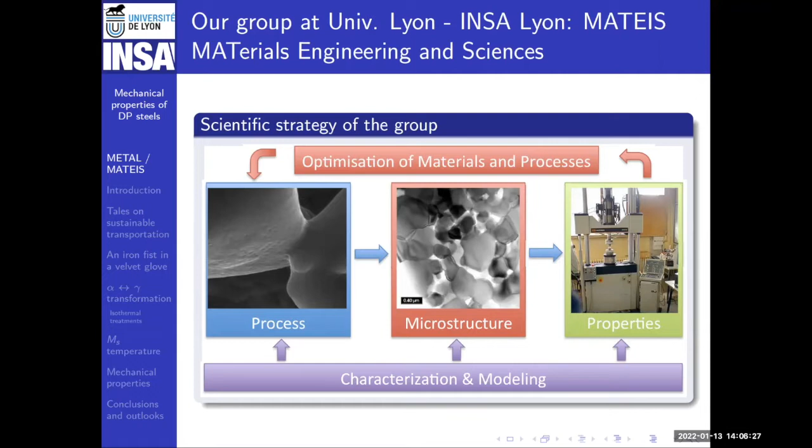Our favorite tools are some characterization and modeling tools. There are some quite historical characterization tools developed in the group, starting from the left: small angle X-ray scattering, essentially for polymers, to detect, for example, for semi-crystalline polymers. Then thermoelectric power, to measure the evolutions in the microstructures of metals.

X-ray tomography—and very small here in the picture is the head of the lab, Eric Maire, who was famous here at LMS because he used to work a lot with Michel. Some of you may know Michel, some of you may not, I don't know. This guy was really working together with strong connections, us doing the 3-dimensional analysis and you doing the mechanical modeling. There was quite a nice history of collaboration between MATEIS and LMS with this technique.

And of course, at the right, electronic microscopies: transmission, scanning, and all these techniques.

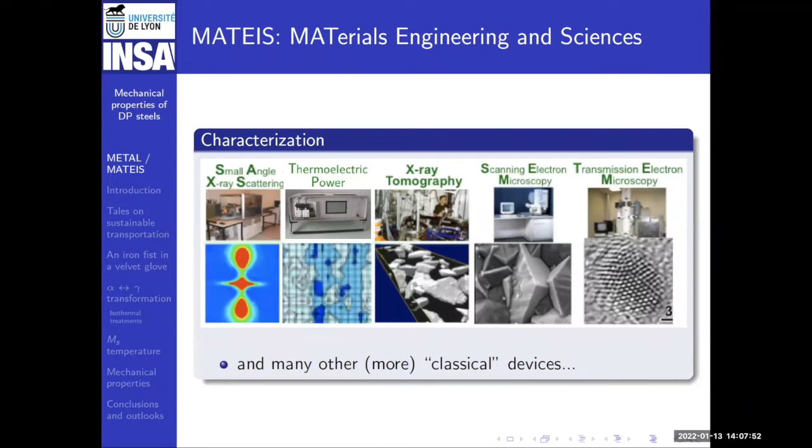In parallel, it's a bit more recent—let me change my slide. In parallel, we developed many simulation tools to better understand the build-up of the microstructures of materials and also the mechanical properties. This graph is something you've seen a thousand times, and these tools are the ones we are developing at MATEIS, from the atomic scale.

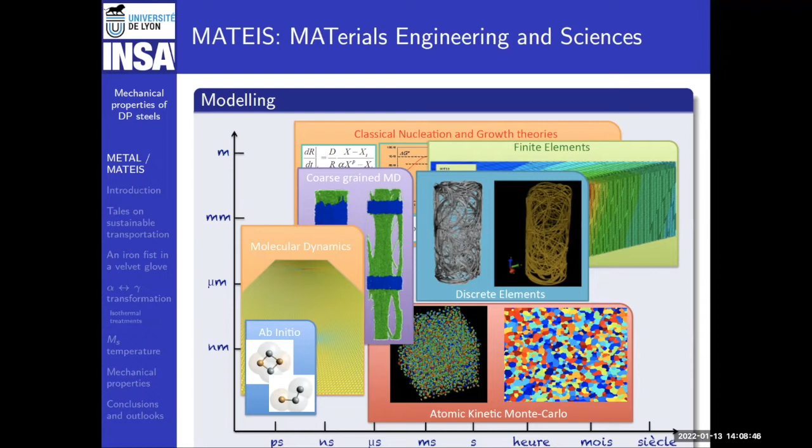So from ab initio simulation, molecular dynamics, coarse-grained molecular dynamics to study, for example, block copolymers, to finite elements, passing through atomic kinetic Monte Carlo, and all these kinds of simulation techniques that we are developing.

Within the MATEIS group there are a few teams: one studying polymers, one studying ceramics, one studying metals. Here I will present my team, the one I know better, the metal team, the group of people studying metals. We are approximately 60 people including everyone, with a majority of PhD students, the ones actually doing the research. Here are some numbers you can read if you want, concerning the metal team in MATEIS.

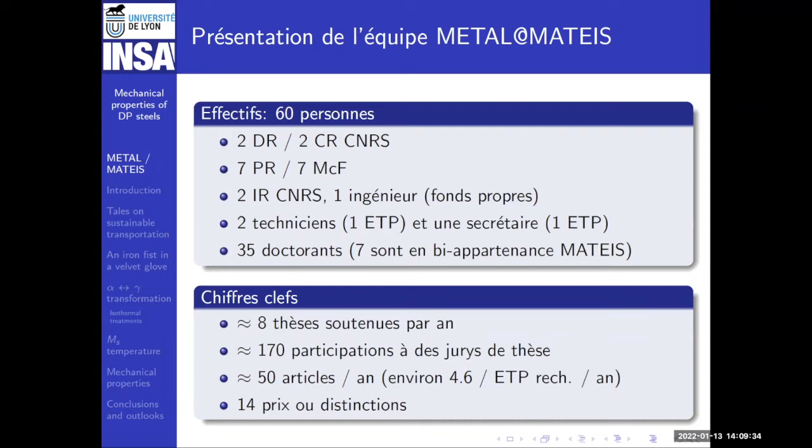Any question? Okay, so in the metal team, what are we doing? We have mostly three main activities. The first one is elaboration—how to build...

Oh, that's great. Super, excellent, thank you very much.

First team is elaboration. We are building graded materials, studying sintering, welding, and we recently bought arc melting and atomization, which is coupled to robocasting. So we can make nice materials with nice structures.

In parallel, there are people working in what we call physical metallurgy. This is the understanding of the build-up of microstructures. One group specializes in studying mechanical properties, because most of the materials we study in the metal group are studied for their mechanical properties. We are increasingly doing very specific elaborations for other properties too, beyond structural ones, for example biocompatibility for biomaterials. But basically, this is the DNA of our team.

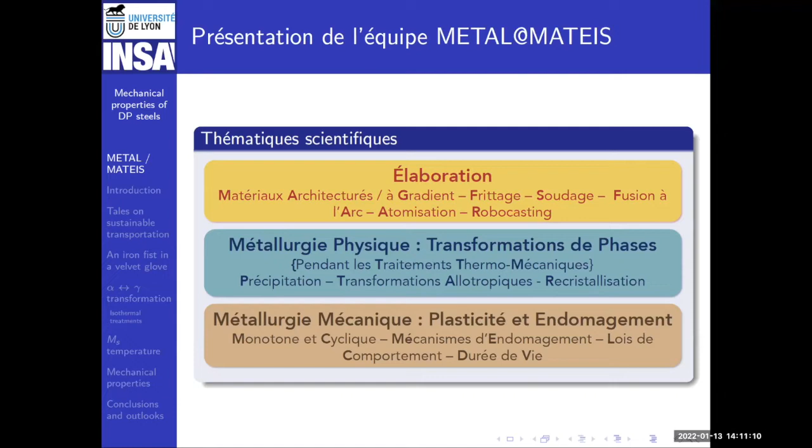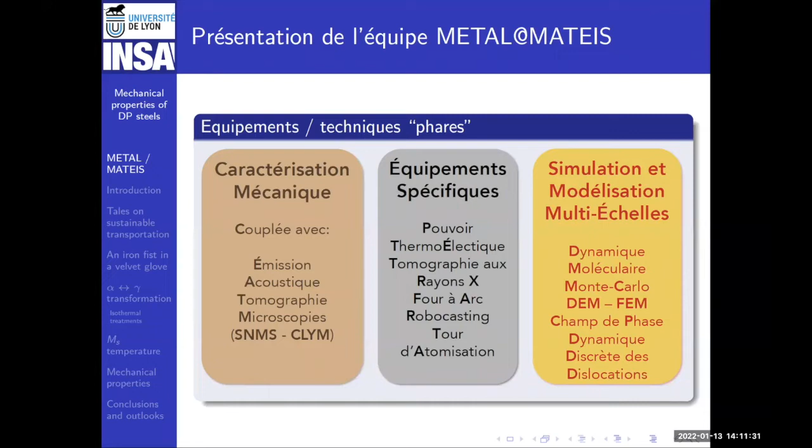So what are the characteristic equipments that we have in the metal team? Techniques to characterize the materials, specific techniques that I presented, and simulation techniques that I also presented. So this gives you a quick overview of what we are doing in the team. Any questions? Okay.

As I said, there was a quite interesting history of collaboration. I think it stopped because of the departure of Michel. It can start again, of course.

The motivation of this PhD work I'm going to present is to improve the properties of what we call the body in white of a vehicle. The body in white is the bones, the backbone of a car, made of metal. As you know, if we improve the fabrication process, eventually we can have lighter materials. That's our business: how to design, how to make lighter materials.

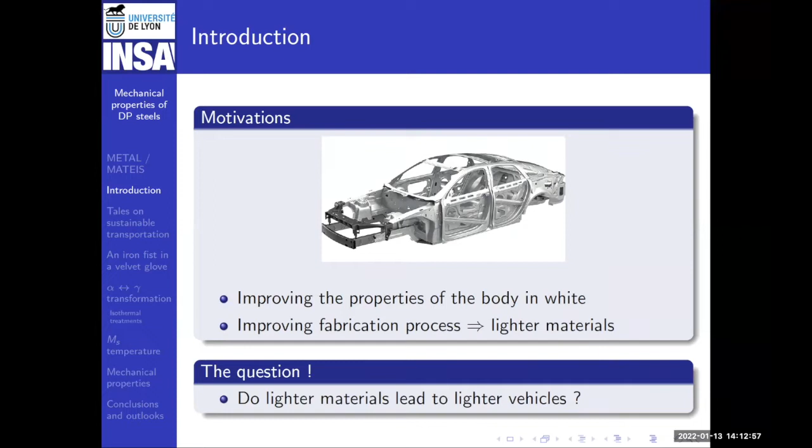There is this big question: do lighter materials lead to lighter vehicles? That's the motivation. We often mention greenhouse gas emissions. Of course, if we have lighter vehicles, we save gas and then we save CO2. In fact, this question is not so simple, as you will see.

And this brings me to the tales I wanted to present. The first tale is that progress in material science makes cars, and planes too, lighter. In fact, if you look at the numbers, the average mass of vehicles over time, you see that cars, even though we expect them to be lighter, are actually heavier. What a failure. So what went wrong?

We are making lighter materials for sure, I promise, and you are also maybe doing the same. Yet at the end, with lighter materials, we build heavier cars. That's a big question, isn't it? The first tale people believe is that if you lighten materials, you end up with lighter vehicles. That's wrong, obviously. So there is something wrong here. Maybe we can discuss that later, but this is an interesting point to present.

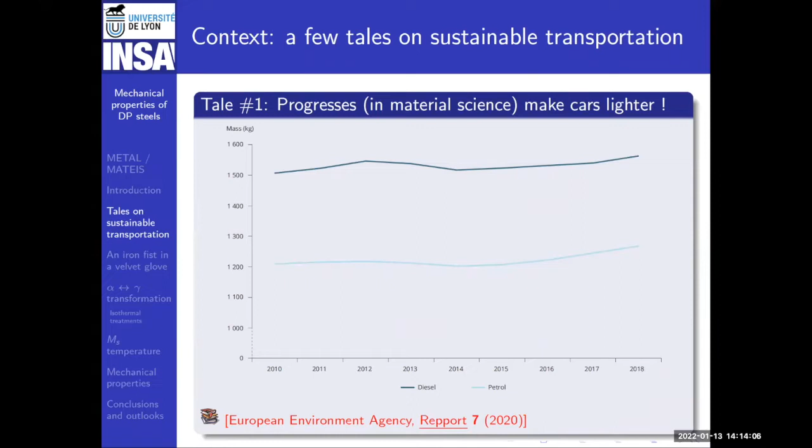The second tale is that, thankfully, we live in the EU. We don't live in Australia or the USA, where there are no rules. In the EU, we have rules and standards in terms of fuel efficiency. And in fact, yes, it's true, but not as we might imagine.

Here is the European Union standard. Here is the emission you are allowed to make if you build the car, and here is the weight of the car. What you see, which is surprising at first glance, is that yes, there is a standard, but it's not a horizontal line. This standard depends on the mass of the car: the heavier the car, the more CO2 you are allowed by the EU to emit.

That's strange, isn't it? So if you are a car builder, would you go there, or would you go there with twice the margin that you have? Obviously, it's better to go there. So there are no real rules to make cars lighter.

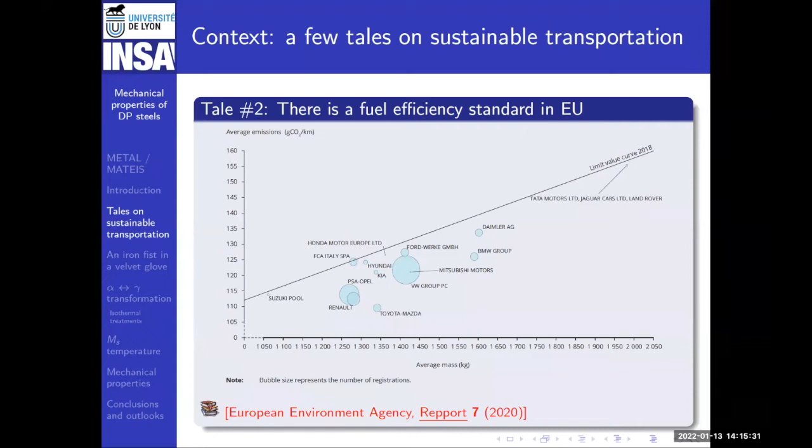So, third thing: recycling. Oftentimes you go to a conference where industrials are invited. I remember at SF2M, there were industrials saying, 'oh, don't worry, we recycle almost 100% of our production, that's fantastic, there is no problem.' Okay, recycling — let's go a bit deeper, let's stay in the car market, okay?

So let's imagine we are in 2019, and let's assume this car market has a growth per year of 3%, which is quite reasonable. So each year, you have 3% more cars than the previous year, okay?

So in fact, this is the actual fleet of cars, and each year a bit of these cars, the blue part here, are dead. And each year there are these new vehicles in red. The difference between this year and this year is only 3%. So let's zoom in a little bit.

So all these end-of-life vehicles, let's say we recycle the steel, the aluminum, all the materials up to 95%, which is really a nice number. So you recycle 95% of end-of-life vehicles, but at the same time you have to build new cars because the market is growing 3% per year. So at the end, if you compare the new cars you have to build, the end-of-life cars, and this 95% recycling rate, you still have half of your production each year coming from raw materials, not recycling, because there aren't enough old cars to recycle.

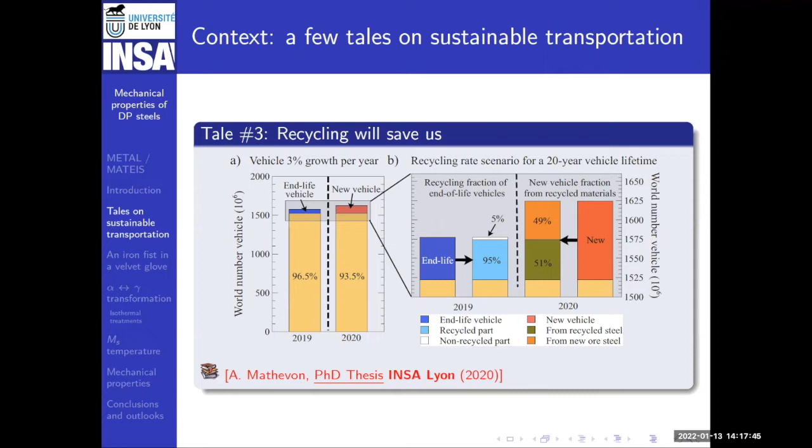Okay, the last one. Oh sorry, yes? I was simply wondering, on the major market, like I suppose the European car market, in the long run is an increase in the number of cars reasonable? I mean, if we assume the number of cars produced is going to stabilize—to me I don't have the figures, but it's not complicated—it would be far less of a problem.

Exactly. All the recycling problems I explained are due to the fact that the market is growing. If the market is plateauing—but I think that's a conclusion we can draw about all human activities—if you are happy with what we have, then we have no problem. The problem is that we always want more, we always produce more, we always earn more, and that's the source of the problem, maybe.

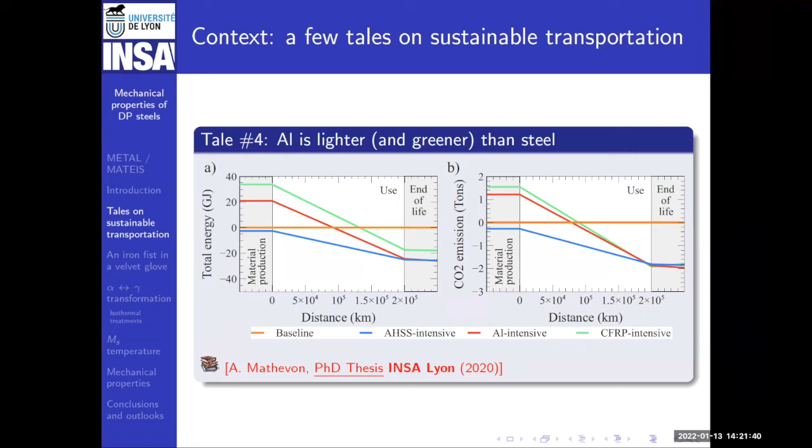Okay, now it's time to enter into the details of what these high strength steels are that I'm going to present today. And I'm going to present one example, which I call dual phase steels.

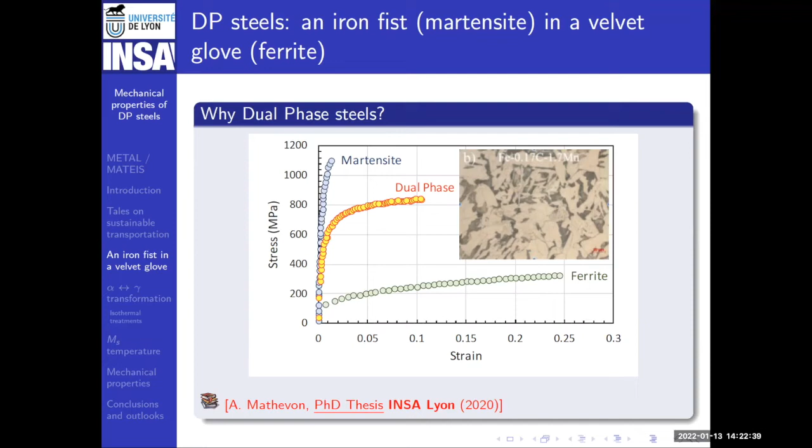So mostly there will be 3 parts to this talk, and don't worry, if we don't have time for the 3 parts, there will be 2. It's not a big deal.

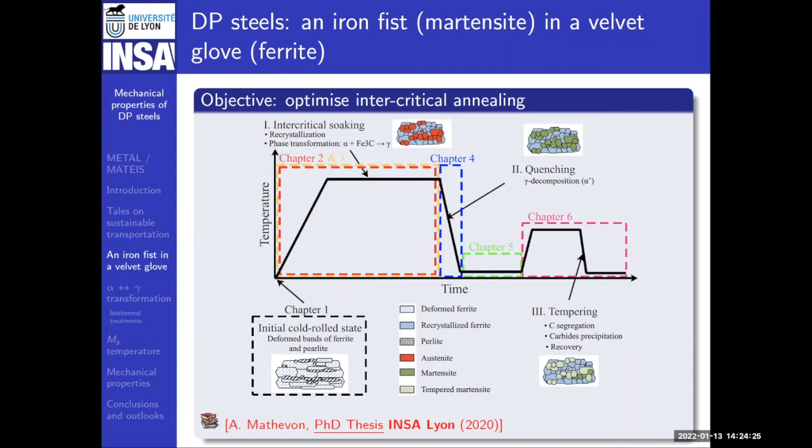Okay, so let's enter into the modeling of alpha to gamma transformation. Recall, this is what happens in dual phase steel when you heat and wait in the intercritical domain, where you have both ferrite and austenite at equilibrium.

So there are some existing models. I'm not going to enter into details. The most famous is Dictra—maybe you know Dictra, it's the friend model of Thermocalc that you may know. But Dictra is based on local equilibrium, meaning equilibrium at the interface, which is not always the case.

There are some other more elaborated models. Maybe the most elaborated one is phase field, that some of you may know. So what we did was we designed a new model which would take a bit of each of them, take only the advantages. The idea is to have a thermodynamic database based on Thermocalc.

We do not require any special equilibrium condition at the ferrite-austenite interface, and the model obeys a simple extremum principle, which is that the direction it will take is the one that minimizes the Gibbs energy function. That's why it's called the Gibbs energy minimisation model. So it will choose the minimizing direction to minimize the Gibbs energy.

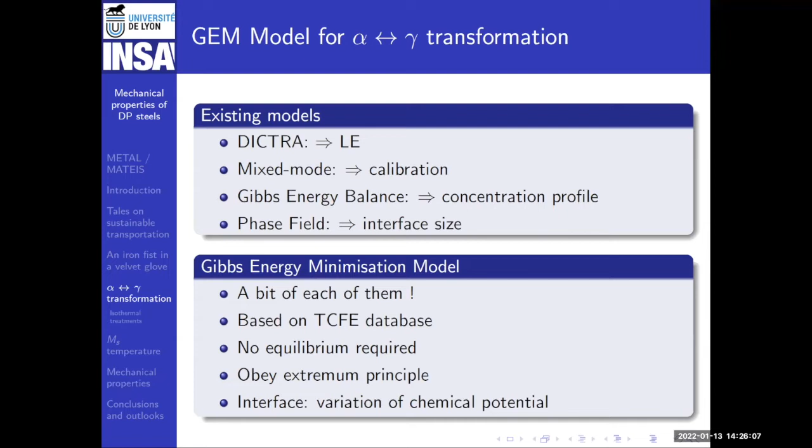So to build this model, we start with the first ingredient, which is extremely well known and nothing new: we model the fact that a diffusing element, a solute atom gradient, will naturally transform into a flat profile. So first ingredient, diffusion—diffusion of, for example, carbon or manganese or any kind of solute elements in the steel, in both ferrite and austenite.

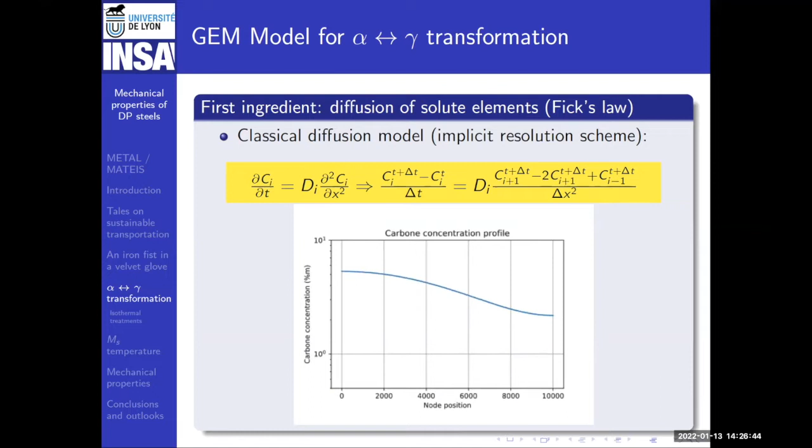Second ingredient: remember, we want to model the transformation of ferrite into austenite, so we have a moving interface, and we want both phases to be described with an interface. If you have an interface, you cannot use this classical Fick equation—you have to transform it into an equation where the diffusion is a function of the chemical potential and not only the concentration. So we have to slightly transform the diffusion equation, and let's say that the interface is seen as a chemical potential variation.

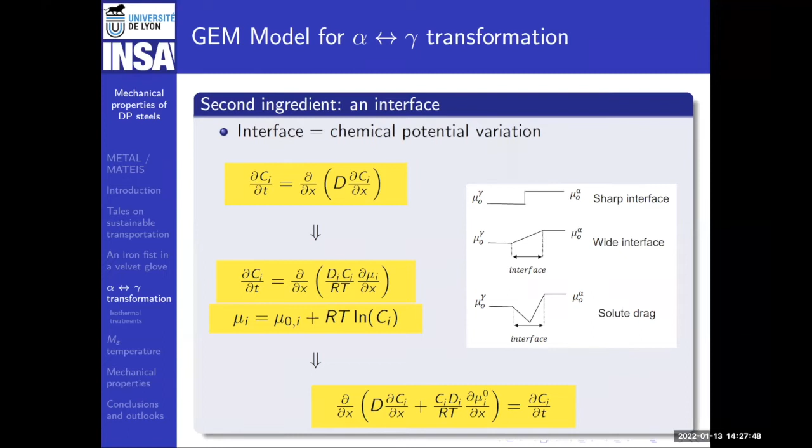If you have, for example, austenite on this side and ferrite on this side, the chemical potential is a step function like that. We can have an interface which has a certain width, and eventually a kind of potential well, accounting for the fact that solute atoms may prefer to locate at the interface. So once we include this ingredient, let's see what happens when you start with a constant concentration profile, but with a chemical potential that makes a step. What we end up with is a concentration that's higher in one phase and lower in another. If you think of iron-carbon, for example, carbon solubility is much higher in austenite than in ferrite. So that was the second ingredient of the model—the modeling of an interface with two different domains.

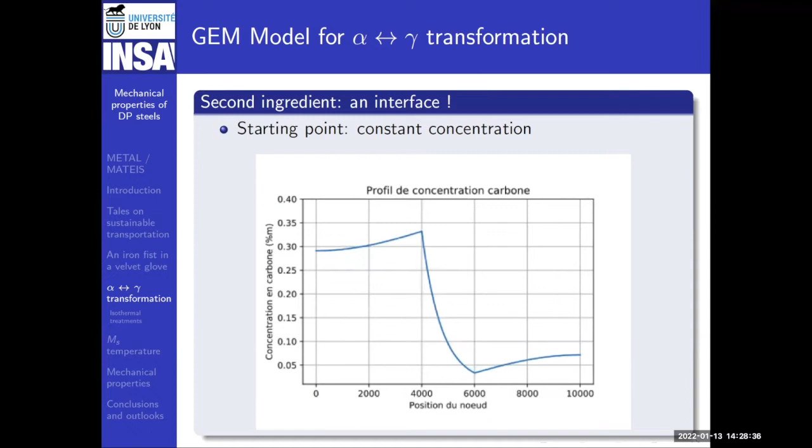So simply, the movement of the interface is the one that will minimize the Gibbs energy. So if the interface is here, the model checks: if I move it here, will it minimize the energy? No, okay, I don't move it. If I move it one step backward, will it minimize the energy? Yes or no. And we choose the position that will minimize the energy.

And we can have one interface between austenite and ferrite, but we can also have two interfaces between carbide, austenite, and ferrite. I won't go into detail, but sometimes the presence of these carbides completely changes the kinetics because they can store a lot of solute atoms.

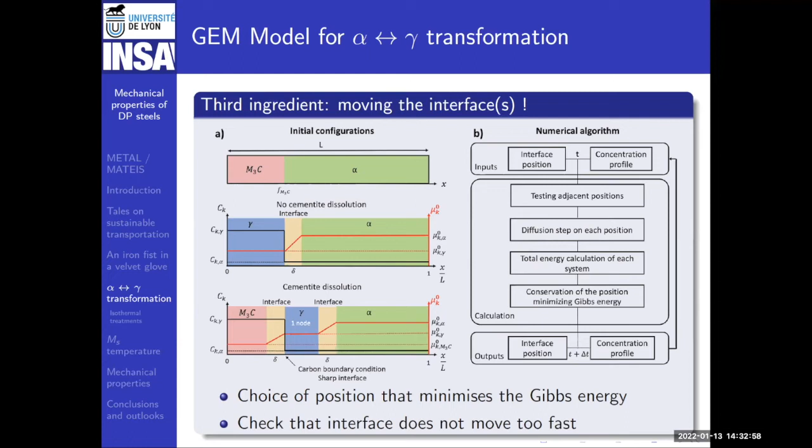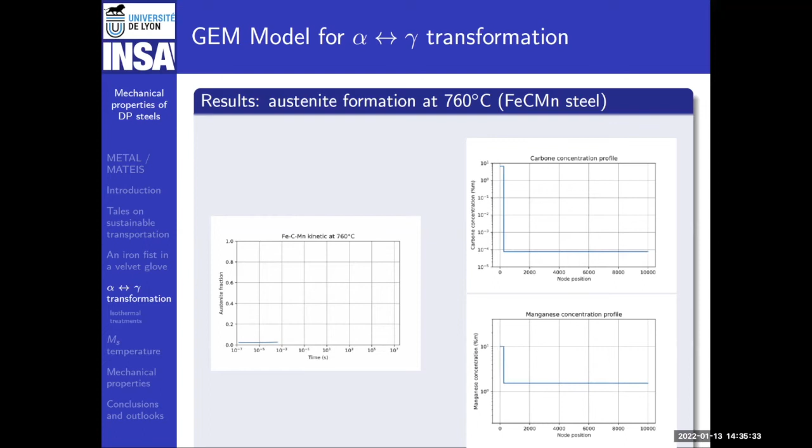So DICTRA is not in agreement with Thermo-Calc, which is strange since the same company sells both modeling tools. That was funny—the Thermo-Calc model gives one result, but DICTRA ends up with a different value at the end, which is not the case for the Gibbs energy minimization model.

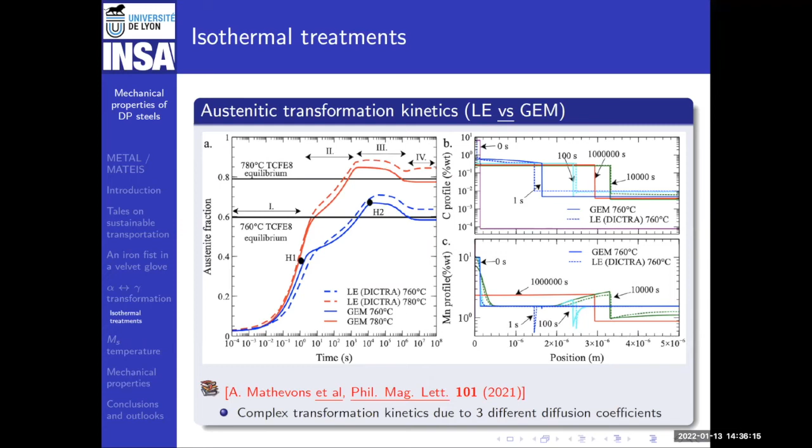Now that we have this tool, we can study interesting features, like the amount of manganese in the steel. Starting from very low manganese steel, you have very fast transformation kinetics. If you increase manganese, there's a threshold where the transformation kinetics become much slower.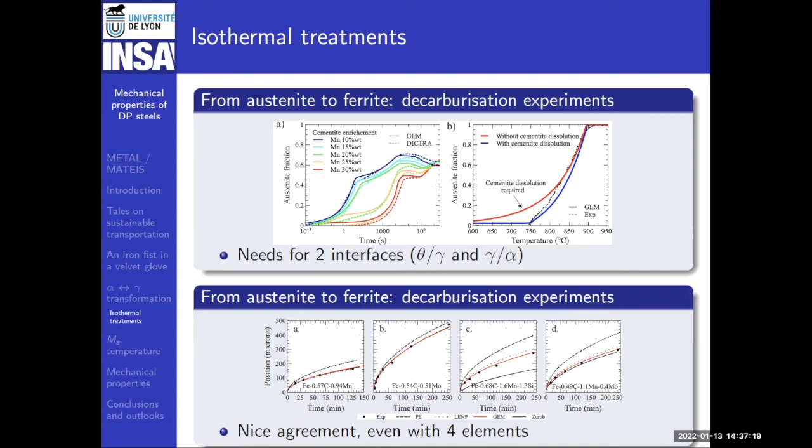For the industrial partner, this was interesting because they wanted to know how long, at which temperature, we achieve this fraction of transformation. So this kind of graph is interesting for them. The model was also checked on other systems, where we studied transformation kinetics from very famous experiments performed by other researchers.

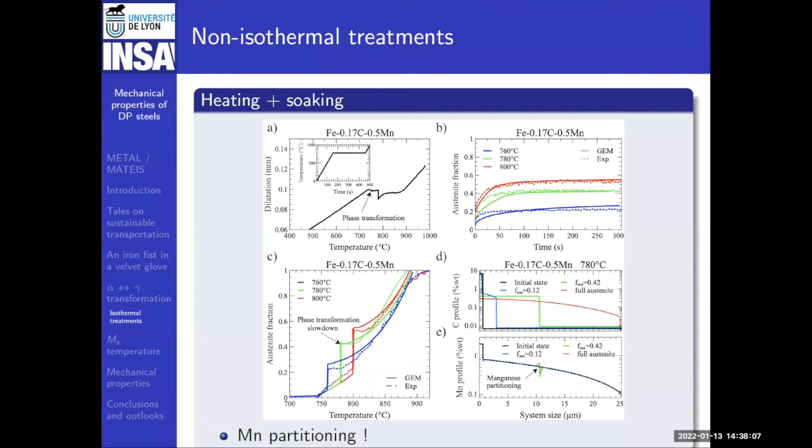We also did more complex treatments, closer to industrial ones, with heating followed by isothermal holding. We see that during heating and isothermal holding, the transformation stops and continues. During heating the transformation progresses, then continues while at the same temperature, and when heating resumes it starts transforming again. Importantly, during the isothermal process, the transformation continues and we have manganese partitioning, which is very important for the kinetics of the transformation.

Now we have a model to predict the fraction of austenite that transforms into martensite or stays as ferrite during quenching. But it would be nice to have another model to predict the MS temperature—the temperature at which, during quenching, austenite transforms into martensite. There have been many studies to estimate, depending on steel composition, the martensitic start temperature.

What we could do is run experiments and measure the dimension of the part in the Gleeble thermomechanical simulator, which is essentially a tensile machine able to heat samples. Starting from high temperature, depending on the cooling rate, you either form ferrite or martensite if you quench fast enough. Thanks to that, we could plot an experimental TRC diagram, and the aim is to model the whole diagram. I'm going to start today with how to predict the martensitic start temperature transformation.

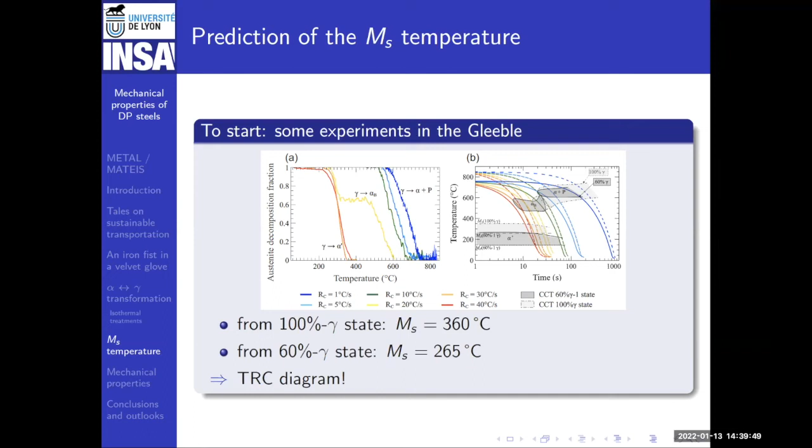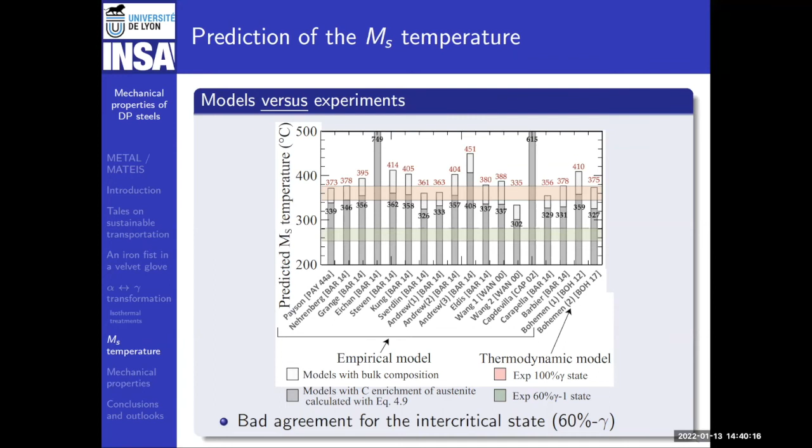As I said, there were many different models that worked quite well for 100% austenitic steels, since they were designed for that composition, but they completely failed to predict the martensitic start temperature for dual phase steels with a mixture of austenite and ferrite. So why? To better understand this disagreement, we chose the model that was, I'd say, the best we found in the literature—based on thermodynamics—which could predict MS temperature. This model worked fine for 100% austenite, but for dual phase steels it was failing.

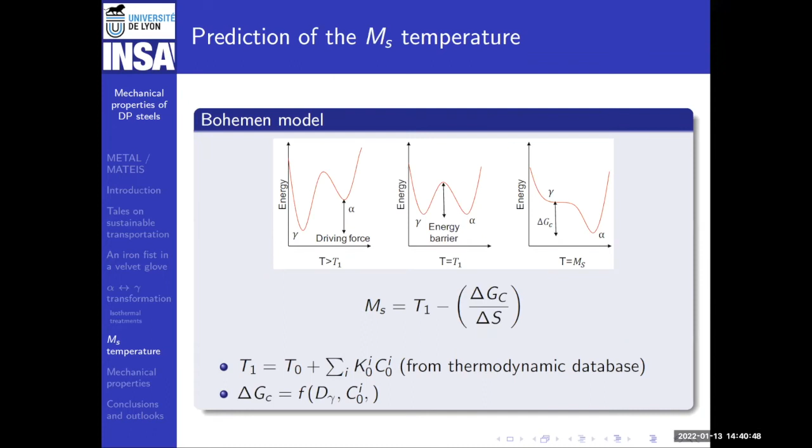So why? This is the martensitic start transformation temperature predicted by classical models, and this is the experimental value. There's nice agreement, but the problem is that for 60% austenite steels, the experimental value is here.

So we have to account for a few things. The first thing is to account for the grain size. Okay, it brings us here. And the second thing is to account for the carbon concentration, which we can calculate thanks to thermodynamical calculations.

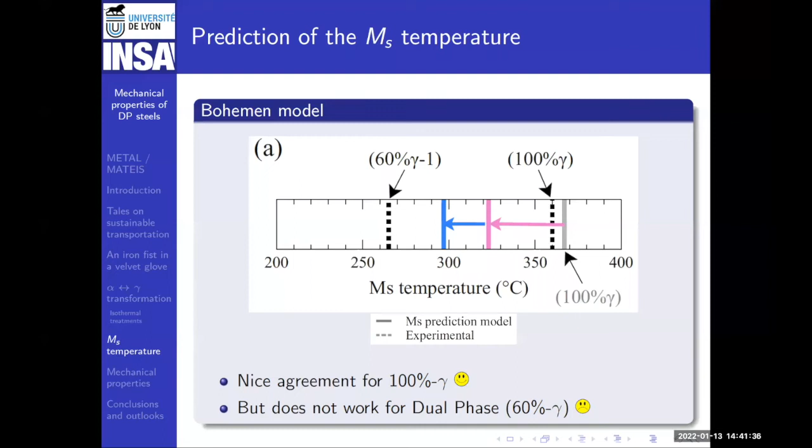So it's okay for 100%, but it doesn't work for the 60% austenite steel. So to make this model reach the actual true line, we have to account for the actual manganese content, not the one given by equilibrium, the one that was given by the previous model at the interface. So we have to enter not the global manganese composition of the steel, but the local composition at the interface.

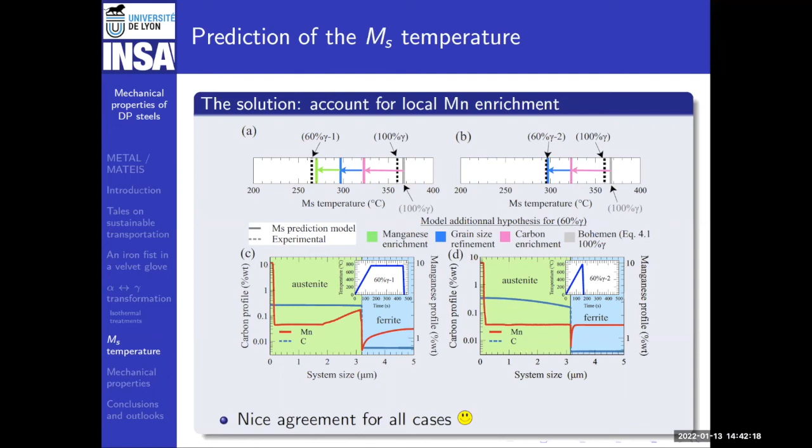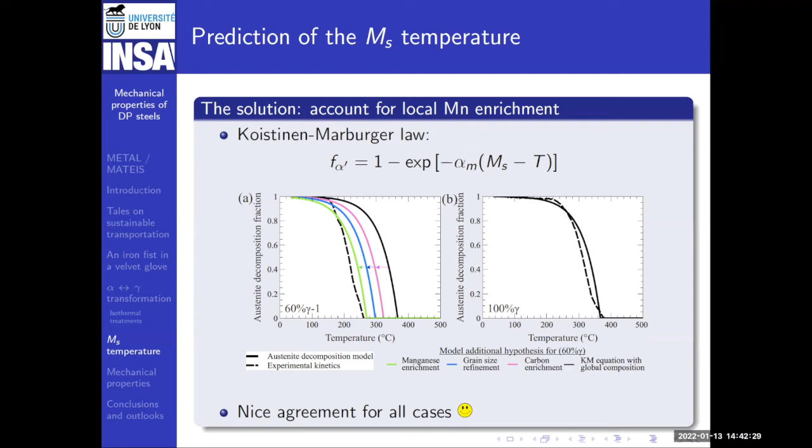And if we enter this particular composition in the model, then we can make it fit to the true martensitic start transformation. So, accounting for the local composition of manganese that we took from the previous model, we could get a nice agreement for martensitic start temperature.

And now, last part of the talk, and I'm going to be quite fast because it's something that you better know, it's mechanics. How do we model the mechanical behavior of a composite of ferrite, soft, and martensite, hard?

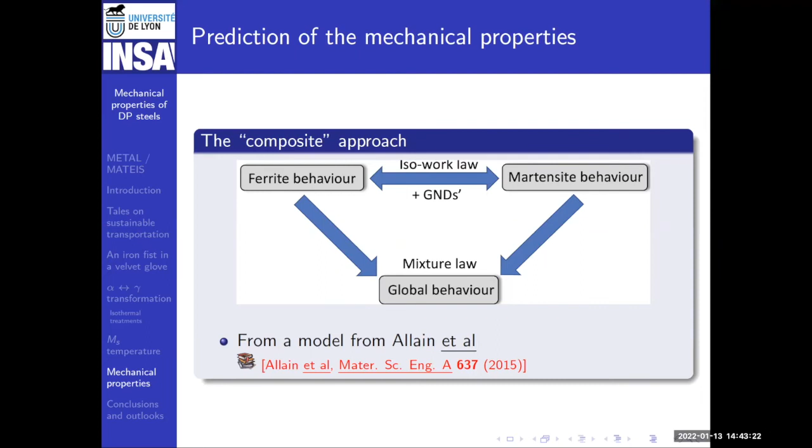You know that there are some laws when you mix the hard phase and the soft phase. You know iso strain, iso stress, maybe you know iso work. These are the three classical laws that are used, but there are many others. And what we want, in fact, is to have the global behavior. We adapted an existing model from Allain et al, researchers at Nancy.

So first, we take a constitutive law for ferrite. I'm going to go quite fast because it's something that you know. It's a Kocks-Mecking-Estrin classical law where you have the contribution of kinematic hardening, the contribution of the forest hardening, and the base stress, Peierls force, plus solid solution hardening.

So here are all the equations that you need for this classical Kocks-Mecking-Estrin approach, where you have this law that combines all the stresses. You calculate the forest stress due to the dislocation density here, and you have an equation of evolution of the dislocation density as a function of strain with annihilation and multiplication terms. This is nothing new.

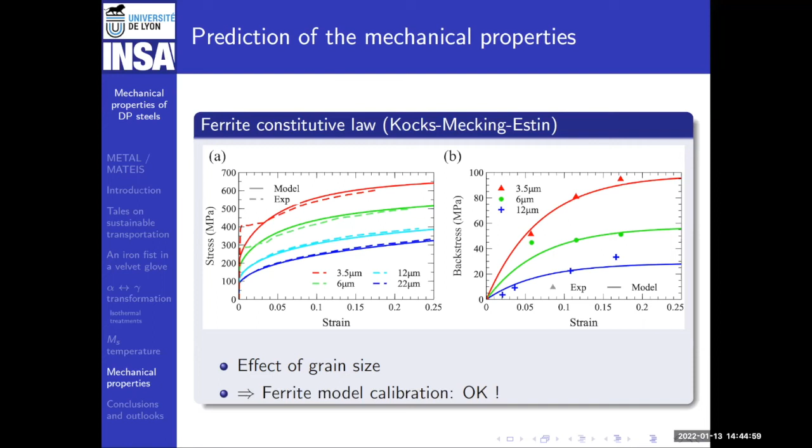Kocks-Mecking-Estrin, let's say these kinds of models are, I don't know, maybe someone in the 50 years. No, Estrin is not so old, but Kocks-Mecking, these are quite old contributions. So if we parameterize the model, you can fit the tensile behavior of fully ferritic samples. Okay, so ferrite is okay.

Now martensite. For martensite, we use a slightly different model. In fact, here the equations are much too small. We don't care about the equations. What is interesting is the basics. So we say that martensite is a mixture of many, what do we call them, elementary units that are combined together.

These elementary units have a purely elastoplastic law with yield stress that is distributed like that in this yellow function. So there is an infinity of elements with distributed yield stress. And it's kind of mimicking what is happening in reality in martensite. So you know that martensites are needles. Some of them are very tiny, some of them are larger, and the local yield stress of one needle depends on its size.

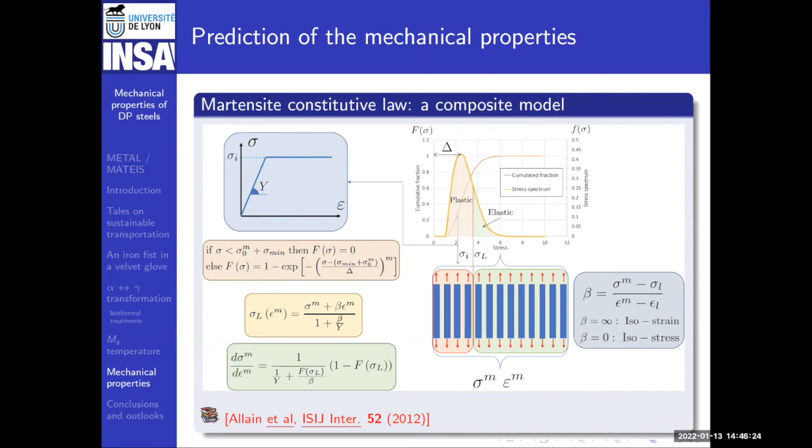So you can assume that it's distributed like that. And if you combine with a law of mixture that is in between isostrain and isostress, you can end up with an evolution equation that gives you the mechanical property of martensite. We don't have to enter into the details of these equations, but what is interesting is to know on which basis it's built. And then, once again, fully martensitic steel, depending, for example, on carbon content, manganese content, grain size, we end up with a model that works quite well for fully martensitic.

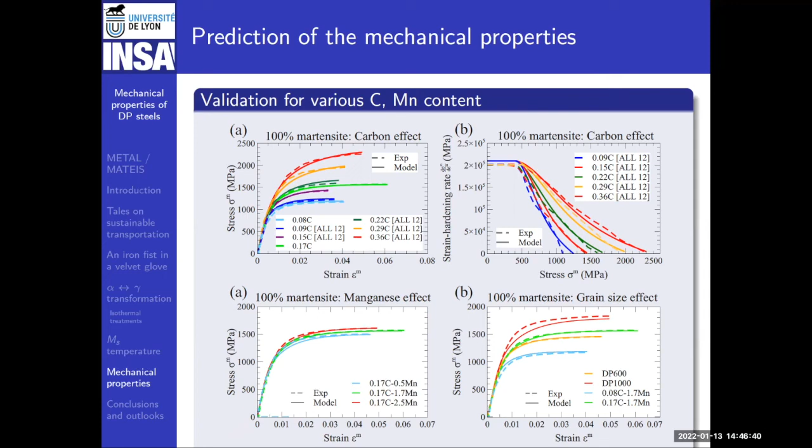And now we combine the two.

What we noticed is that neither isostrain nor isowork works well. If we want to understand what's happening, we have to look at the evolving microstructure using EBSD, where you can see the local misorientation, and you can see that at the beginning, for fairly low deformation, martensite and ferrite deform the same way. But at some point, martensite fractures.

So imagine you have two percolating phases, one hard, one soft. For low deformation, they are both deforming the same way, isostrain. But past a threshold value, martensite is starting to break. So we are slightly going from isostrain to isowork. And this is what is new here.

This transition between isostrain and isowork from the investigation of the microstructure led to a law of mixture organized this way: if epsilon is 0, then it's isostrain. If epsilon is larger, smaller than 0.04, it's a hybrid law going from isostrain to isowork depending on epsilon of martensite, the deformation of martensite. So we start from isostrain, we end up with isowork law, and in this domain, it's this law that goes from this to this expression.

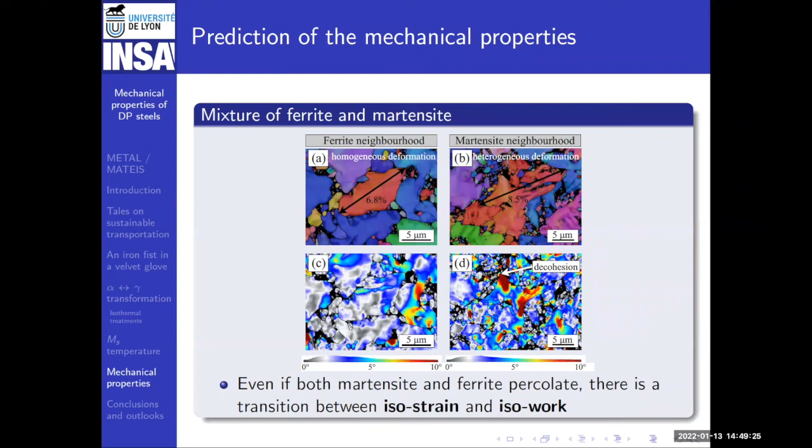How do you pick the threshold between the two models? In fact, the threshold is taken from microstructural observation. So this 4% is that we look in the EBSD maps, and we say that always for deformations that are under 4%, martensite and ferrite deform uniformly. So there is a uniform map. Above this threshold, there is some equation, non-uniformity. And that's this EBSD that told us that we have to introduce this 4%.

But is it the threshold the same for the full metal, or do you also have different thresholds depending on composition? That I don't know. In fact, for our materials, for martensite plus ferrite, we noticed that the threshold was 4%. Maybe for other materials it can be different numbers. I'm not saying it's a universal threshold. It depends on the properties of each phase.

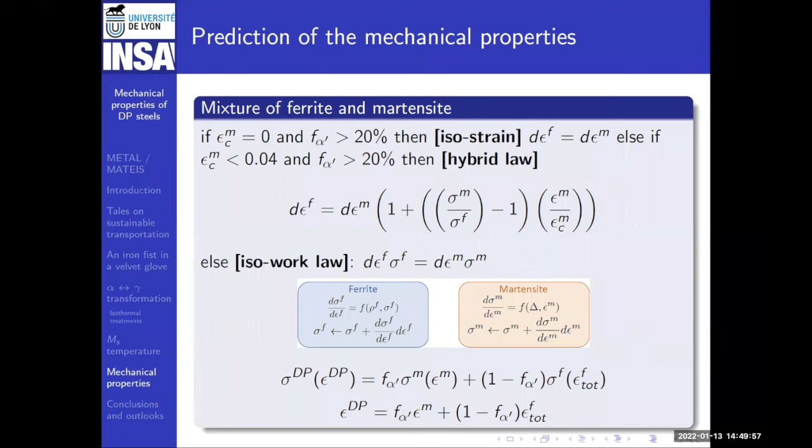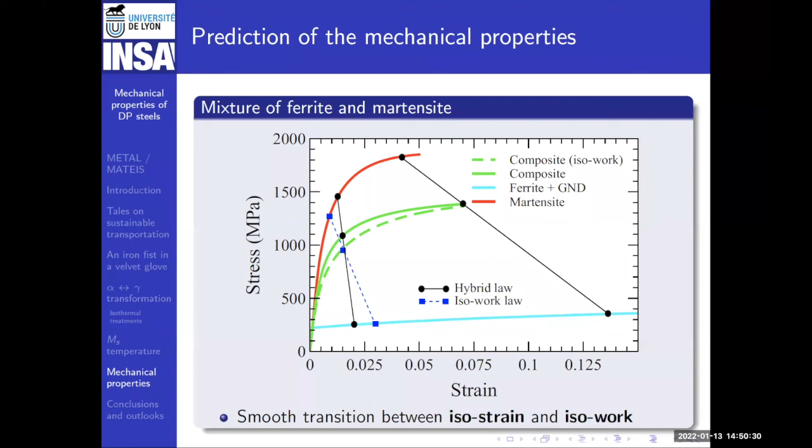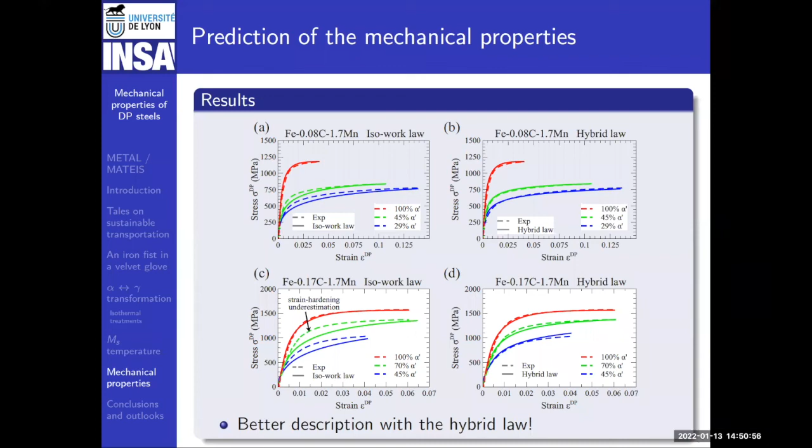And this is the validation of the model for different levels, for different steels, depending on the carbon composition, the manganese composition, different compositions. And we checked that the constitutive law, the hybrid law, leads to a better description than what was usually done using an isowork law from beginning to the end.

So what we checked also, but that's another story, is that we could also predict what is happening during aging, modifying the amount of carbon that was in solid solution. You know that if you age a martensite, carbon will precipitate, and if you can predict how much carbon can go into carbide and leave the solid solution, you can predict the mechanical properties of the martensite and of the composites.

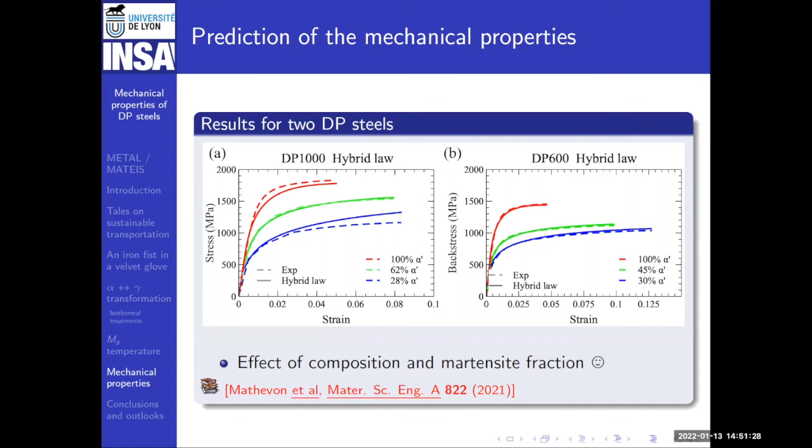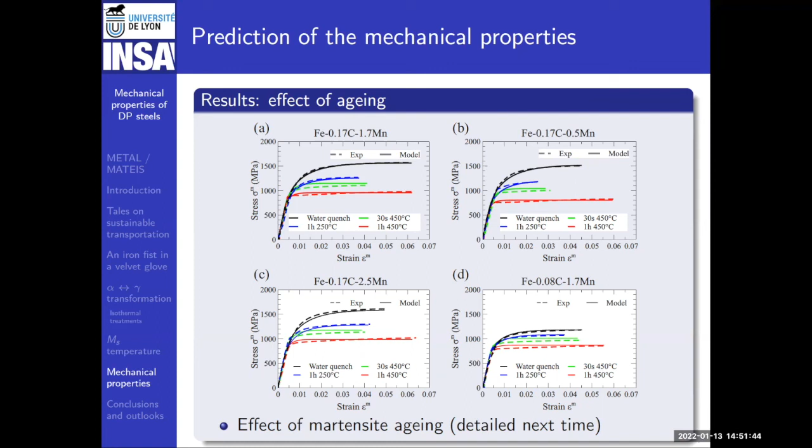This is the results of aging at different times, different temperatures, and we can predict quite correctly the evolution of the structure on aging.

So it's time to conclude. If I conclude, I talked about the ferrite to austenite transformation kinetics model that was used as an input parameter to predict the MS temperature, the temperature at which martensite starts, and from the knowledge of the percentage of each phase, we could build up a hybrid law of mixture to account for the fracture of martensite that was observed above 4% of deformation.

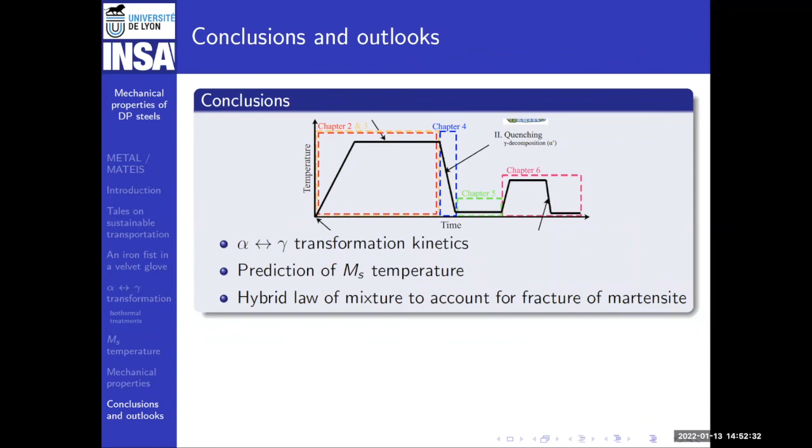As far as outlooks are concerned, the idea would be to introduce the martensitic model, the quench model, into the transformation model to be able to model the movement of the interface back from austenite, but this time to martensite. This is quite complicated because this is not diffusive transformation now, it's displacive. So it's another physics that we have to introduce in the model, not based on diffusion. Maybe we have to introduce nucleation of martensite in this model.

And of course, the holy grail would be to model continuously martensite, bainite, pearlite, depending on the cooling rate, to have all the possible transformation rates.